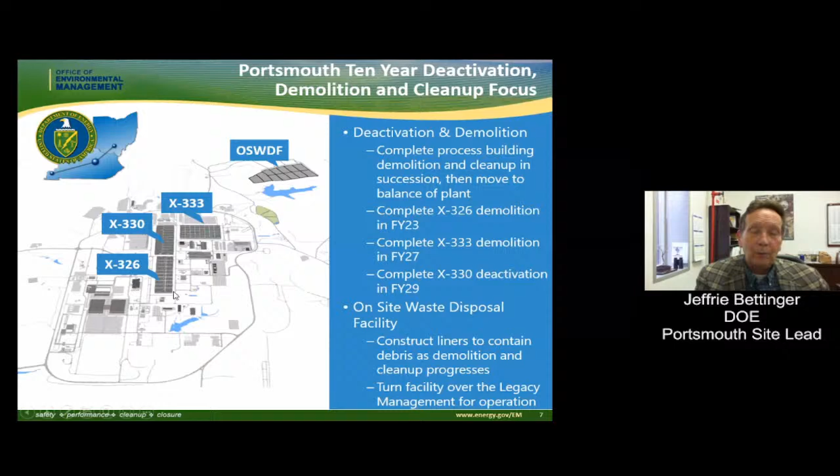When we deactivate a building, what we do is remove the radiological and hazardous materials from the building. In the 326, for example, we remove process equipment and all the asbestos. We'll be doing that in other buildings, although not necessarily all of the process equipment. Some of it will be able to go into the on-site waste disposal facility. The 326 was unique in that respect. But then we'll move to the 333, then the 330, and then we'll work on the balance of plant. And we're constructing the on-site waste disposal facility in parallel with this. May I have the next slide, please?

This is a great shot showing the 326 process building demolition. It's really kind of neat that we can get drones and come in and get good perspectives and photographs of this. I mentioned to you we completed the deactivation in September of last year. What that means was that all of the hazardous material had been removed from the building, and over 93% of the radioactivity, the radiological materials, have been removed from the building.

We did put together an extensive demolition design plan that was approved by Ohio Environmental Protection Agency in February of 2021. And once we got the approval for that demolition design plan, we started removing the transite. Transite is the material that basically encloses the building. You saw some pictures of it in the beginning. It's like large sheets of corrugated, it's almost like corrugated plywood, only it's an asbestos containing material. We don't want to do demolition with asbestos there because that creates asbestos dust. So we remove all of that material and package it up, and it goes into the on-site waste disposal facility.

You will have seen that before we removed all that material, it was a bright blue. And that's because we sprayed fixative on it. And fixative is really a souped up paint that's used to contain any dust and debris that could come off. It's widely used in the nuclear industry and in other industries to control dust before demolitions occur.

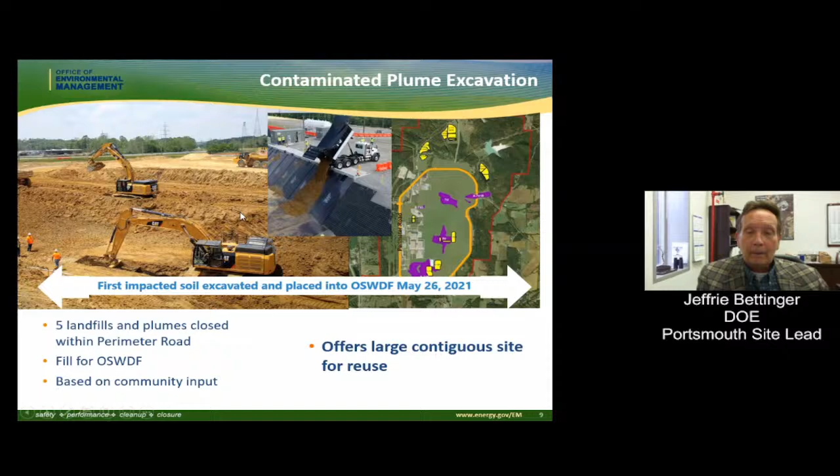I talked to you a few times about the on-site waste disposal facility. This is another overhead shot of it. I also spoke to you about the transite that we took off, and I said that we package it up and then put it in the on-site waste disposal facility. That was the first waste that we placed in the on-site waste disposal facility. You can see it there. It's actually wrapped up.

That's because it's asbestos-containing waste. And we use that and then put it in as a bottom layer in the on-site waste disposal facility in several grids, and then put soil on top of it, and then the debris goes on top of it. But let me talk to you a little bit about the photos that you see here, this drone shot of the on-site waste disposal facility.

On the left-hand side, you see cell one. We completed construction of that last year, and it is currently accepting waste. You can see that not the entire cell is active because you can tell by the soil in there. Some of those are grids that are closed up. We call the area where we place the debris a grid, and it's all cataloged so we can keep track of the material that goes up there. So we know which grid each truckload of material goes into.

You can see the darker brown areas. Those are active grids that they're working, where they're taking the debris in there and they put it in place, and then they're compacting it and putting soil on top of that and recompacting it to work it. We have dust control at the on-site waste disposal facility, similar to what we do at the structural demolition, and we also have monitors in the area.

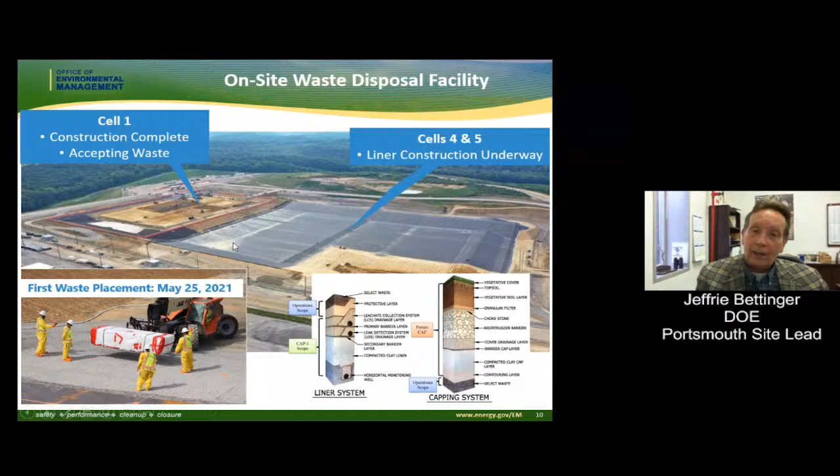So I talked to you a lot about what we're doing out there, but how did we get to the point where we decided to do that? Our integrated safety management system, which is the way that we approach things here in the department, tells us to first look at what we're going to do and try and determine all the potential hazards, all the things that could possibly go wrong. We do that based on our knowledge of doing it, but the most important thing that we do is we incorporate lessons learned from experience at other DOE projects.

And as I mentioned to you before, I've got varied experience. I bring that to the table, and a lot of our other folks that are working here are able to bring their experience, and also subcontractors bring their experience, like our demolition subcontractor. They bring their experience to the table, and we try to identify everything that could possibly happen.

First thing that we do is we remove hazards so that we don't have to worry about them when we're doing the demolition. And that's what we did in the deactivation. Took all the asbestos out, the bulk of all of the process equipment, a lot of the piping, did extensive measurements to ensure that any material left in there was safe to go into the on-site waste disposal facility from a radiological point of view.

And we had numerous times when we walked down the building just to look for things that we may have missed when we're doing it. And all this stuff is extensively documented. And any of the other things that we've done are contained in that demolition design plan that I told you Ohio EPA reviewed and approved.

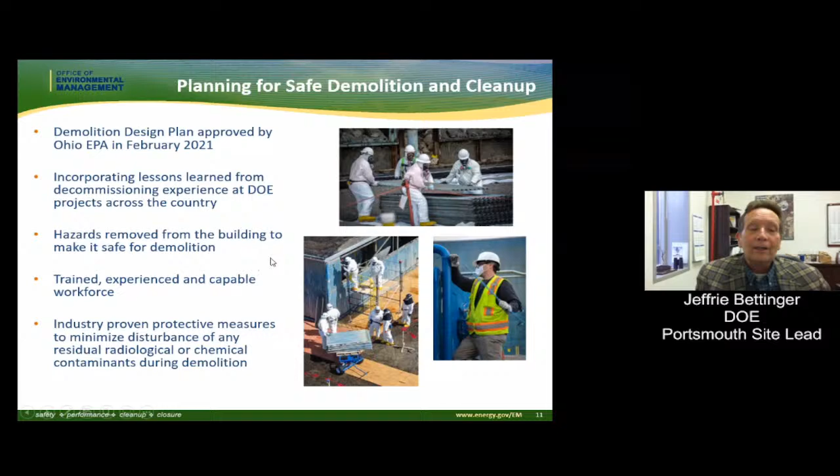We bring in a trained, experienced workforce. Our demolition subcontractors are highly trained, and they've done this work before at other sites. As I mentioned to you before, we use the foggers, things like that; they're industry proven, state-of-the-art protective measures. May I have the next slide, please?

Anything that we can't remove as a hazard, we engineer engineered controls. Many times these are based on common sense and lessons learned. One thing that we had was a lesson learned related to water. We knew that we'd be using a lot of water. We knew that this was a 30-acre slab at some point that would be open, and that even rainwater going on it had the potential to take contaminants off it.

And so what we did is we built a berm around the entire 30-acre slab. And this berm collects all the water that runs off of it, the water that we apply as we're fogging it, as you can see in that photograph, and other water that may come from rainwater. We collect that and we take it over to a facility that is purpose-built to treat this water. This is a part of it. This is the outside where the preparatory work is done on the water before it goes in there.

Inside that white structure that you see there, we have chemical treatment, ion exchange, carbon filters, various processes that are designed specifically for the contaminants of concern to process that material that's in the water. And then once that's done, we're able to discharge that water to one of our permitted outfalls. And we're constantly sampling and monitoring that to make sure that it's working well.

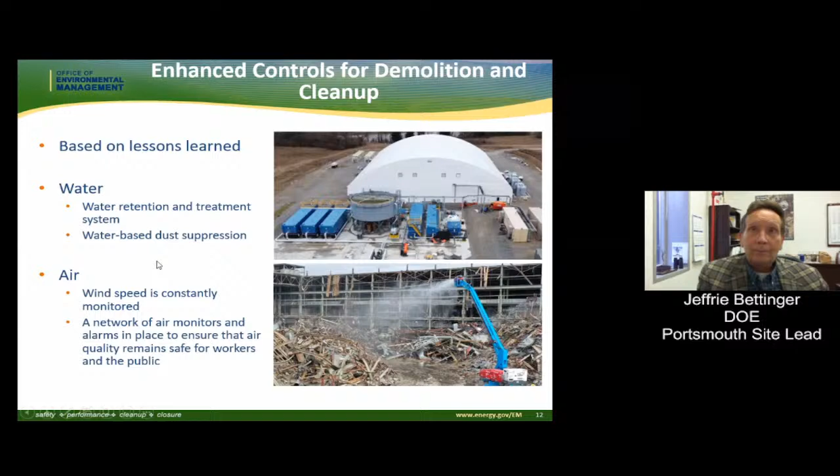And in addition, we have also put a network of air monitors in there. Can I have the next slide, please? Several types of air monitors, in fact. We've got real-time project monitors. Frank's going to talk about that. He's going to explain that to you, and he's going to show you some of the results that we get from that.

In addition, something that I'm very proud of is that we've actually worked with Ohio EPA and ODH and have co-located a network of air monitors on site. These monitors are in conjunction with our existing monitoring system that monitors the site perimeter, both on-site and off-site. Every place where we had a monitor, we put an Ohio Department of Health monitor next to it. In addition, we identified 5 new locations where we put a monitor with the Ohio EPA and DOE.

And those OEPA monitors are monitoring for asbestos, organic materials, particulate matter, PCBs, and those types of materials. And with that, I'm going to turn it over to Dr. Higley, who is going to talk to you about managing risk, and then we'll go to Frank, who's going to talk to you in more depth about those monitors. Thank you.

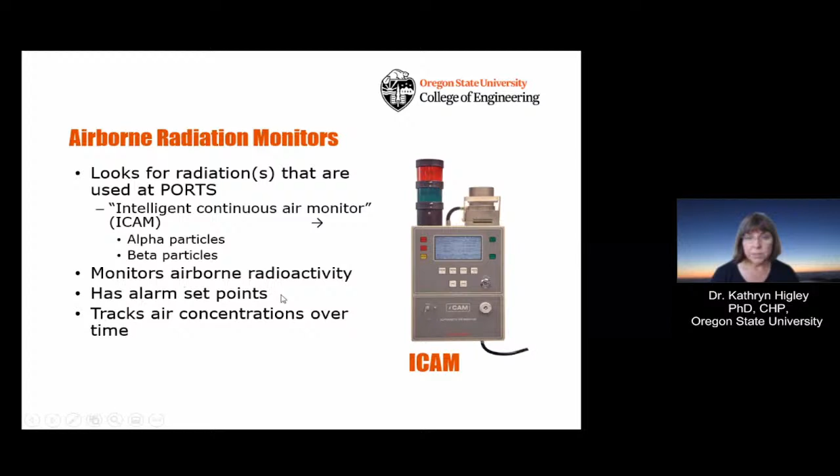One of the types of detectors that they use for monitoring for airborne radioactivity is something called an ICAM, which stands for an Intelligent Continuous Air Monitor. So this is a device that continuously pulls air in through a portal, and it is monitoring both alpha particles and beta particles, which are given off by radioactive materials and the radionuclides of concern from the site. So you can monitor the airborne radioactivity. You can have alarm set points, you decide what those are, and you can track your air concentrations over time. So you have multiple ICAMs located around the site. And again, Frank will spend a little more time speaking to these particular devices. Next slide.

So what does the ICAM look for? Well, it is measuring or tracking radiation doses from airborne radionuclides, radioactive contaminants. And it's monitored, you'll hear Frank talk about this, using the terms DAC and DAC hour.

They're kind of obscure terms, but they're derived air concentration. So it's a measure of how much radioactivity is in air, and it's a worker-focused measurement because you're concerned close in about what the workers are exposed to. So you're setting it to protect those people that are working in the highest potential concentration of these contaminants.

So a DAC is a dose rate, and for example, 8/10 of a DAC gives you about 2 millirem an hour. And a DAC hour translates into a dose, and 2,000 DAC hours translates into 5,000 rem. 1 DAC hour is 2.5 millirem. So one of the questions is why 2,000 DAC hours?

So originally, when they were setting up derived air concentrations, the thought was, how long can a worker working a full year, so 40 hours a week, 50 weeks a year, 2 weeks for vacation, how long can they work in an air concentration to not exceed their radiological limit? And that's where DAC and DAC hours came from.

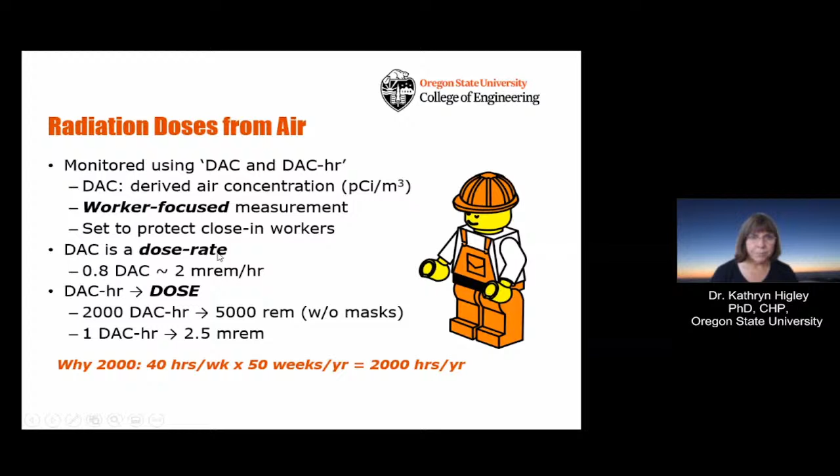So the natural background gives you about 300 millirem per year, just on average for people across the United States. If you have medical procedures, that could add another 300 millirem per year plus. That's things such as dental x-rays, x-rays for broken bones, or CT scans. And to put it in perspective, for Portsmouth, the annual operating activities generate a dose of roughly a millirem a year in the offsite public. And the radiation workers on site typically are getting on average about 60 millirem per year from one of the most recent reports.

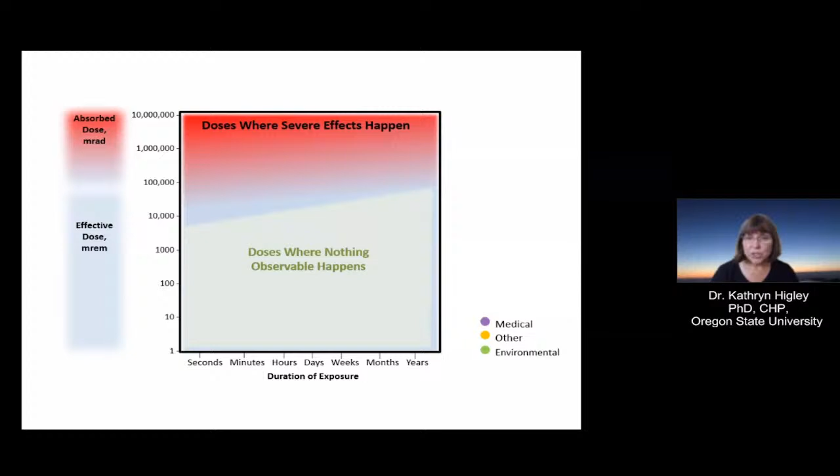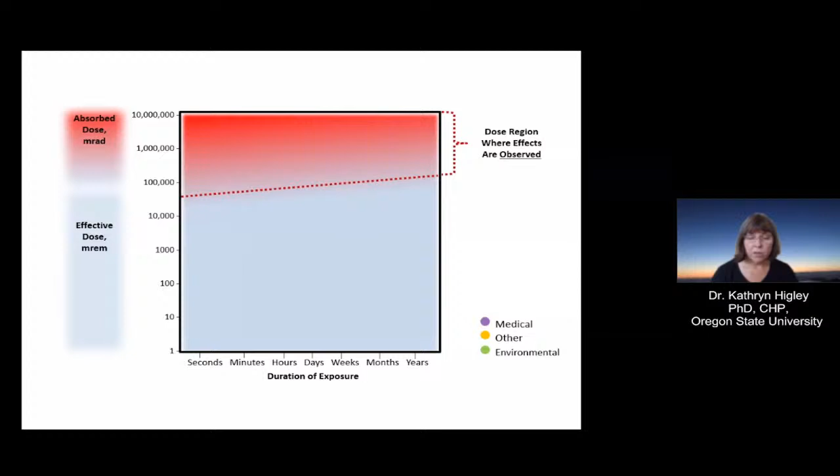So the red portion shows us where we see severe effects from really high doses. And then down in the environmental range, nothing really observable happens. It's very, very difficult to monitor any sort of effect. So again, when you have high doses, you can actually observe acute effects from radiation burns to definitely cancers. But in this lower region, the lower 2/3 of the graph, we have to calculate that using mathematical models. That's where the natural environmental doses fall in. That's where diagnostic X-ray procedures also fit.

But things like radiation therapy, cancer treatment, we are intentionally killing cancer cells. So those are observed effects. And then we've also learned from things such as the Japanese atomic bomb survivors, from the accident at Chernobyl, and more recently the accident at Fukushima. All of these have helped contribute to our understanding of radiation risk.

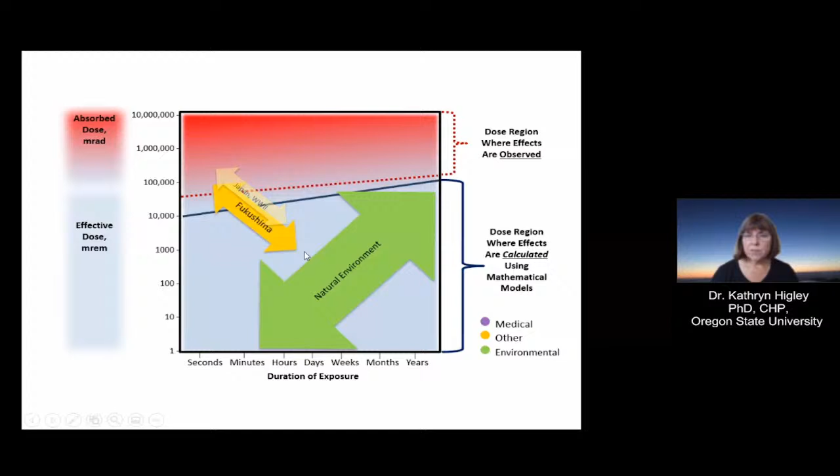But most importantly, as I said, the doses in the natural environment are where we can calculate, but we haven't observed risk. The typical kind of soil cleanup levels that EPA might ask for are down in the 10 millirem range, and the levels of dose from Portsmouth are down in the 1 millirem. And the worker administrative limits are on the order of 2,000 millirem per year. So all in the range where we could potentially calculate an impact, but we do not observe it.

So moving on to particulates, they also monitor particulate material that can be created as a consequence of the decommissioning activities. And the two that are monitored and reported, and Frank will speak to this, are PM 2.5 and PM 10. And these have standards that are specified under the National Ambient Air Quality Standards. They have annual average limits. They also allow short-term average concentrations, and they're different between the two sizes.

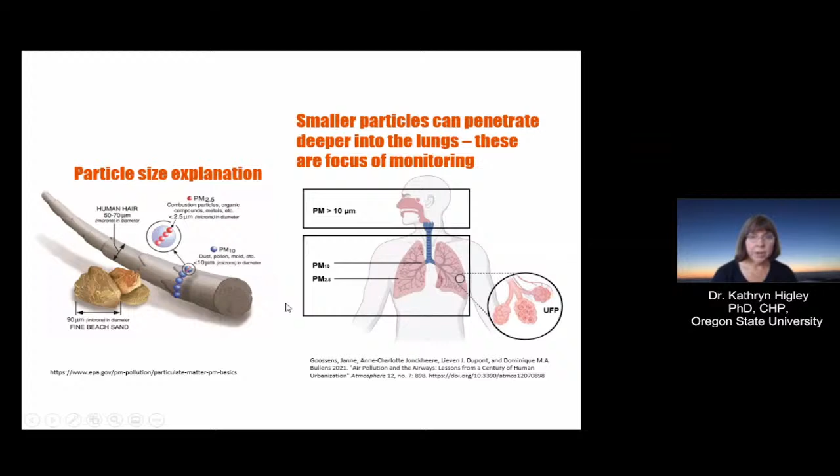Next slide. So with regard to the particulate monitoring for Portsmouth, as I mentioned before, the National Ambient Air Quality Standard does allow for short-term elevated air concentrations. They have specific limits, and those are tracked. But the intent is to allow for worker safety, but still get the necessary work done.

Now, the other thing, Jeff had mentioned about fogging and misting as a way to knock particles out of the air so they don't travel as far. The bigger particles just naturally settle out very, very quickly. The PM10s and the PM 2.5 do settle out, but they can travel a bit further. So again, this is one of the reasons for things such as fogging and misting to help knock them down sooner and limit their concentrations.

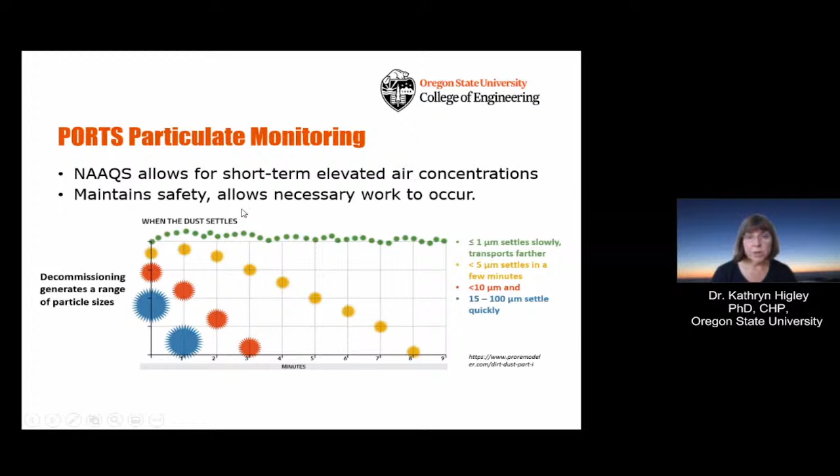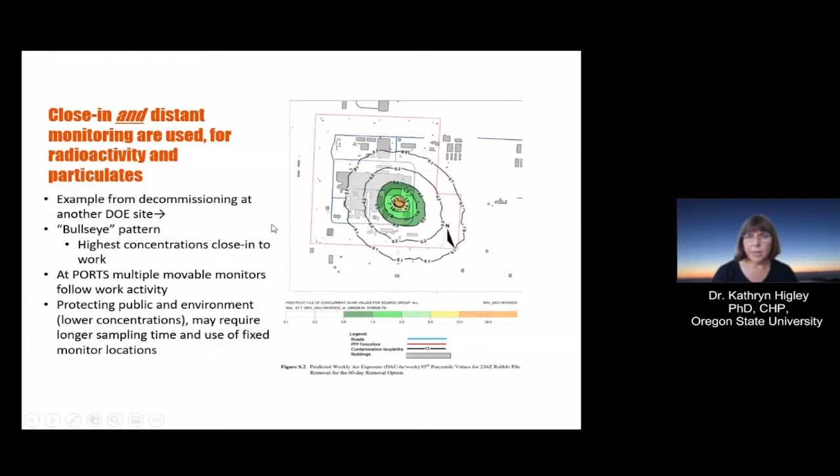At Portsmouth, they have multiple movable monitors. And again, Frank will speak to these. And for the close-in ones, you're monitoring for DAC hours, but for protecting the public and environment where the concentrations may be much, much lower, you may need to use longer sampling times and have fixed monitoring locations and report things in slightly different units.

Next slide. So the whole goal behind these airborne measurements is protecting the people that are taking these buildings apart. You need to monitor the safety and compliance of these activities against standards that apply not just to workers, but for protecting the public and the environment. And this also makes sure that the decommissioning activities meet these standards. So they're monitoring airborne radioactivity for alpha and beta radiation attributable to radionuclides of concern, and those are reported in DAC hours. And then they're also monitoring for particulate matter for the PM10 and the PM2.5. Next slide.

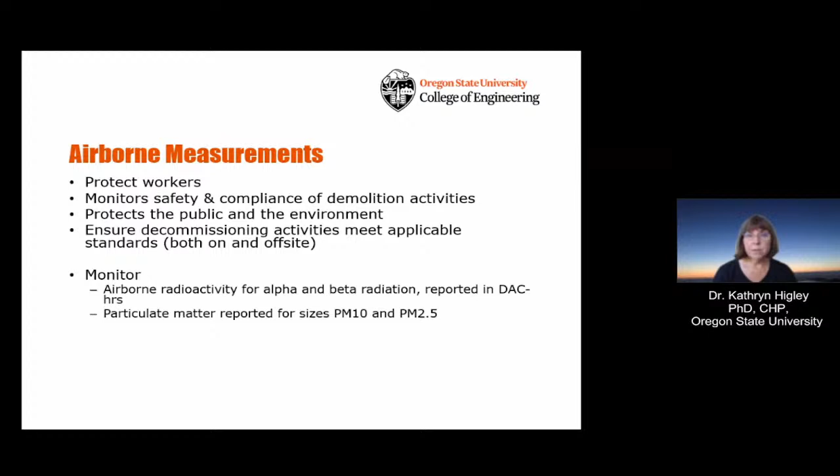So in summary, kind of going back to my first couple of slides, acceptable risk varies depending on your point of perspective, but there are regulations that underpin these things. And importantly, the goal of this remediation is not to remove all the risk, but to reduce it to a level that provides for safety for the workers, the public, and the environment. And safety is always part of this.

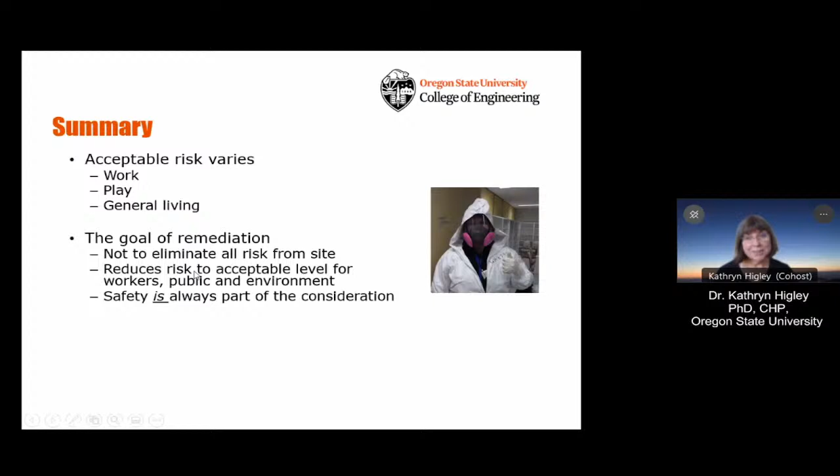I am the Director of Environmental Protection for Fluor BWXT, the contractor to the Department of Energy. We are the primary contractor here on site for the D&D and environmental remediation of the site. A little bit there on my experience. The majority of my experience has been in sites just like Portsmouth, involved with D&D and environmental remediation. I have had experience as a state regulator, and I do have a lot of experience with control systems, wastewater treatment systems, and air pollution control systems. Next slide, please. So you have seen this slide before, but I want to elaborate just a little bit here.

There's not a whole lot of variability year to year, so we have a pretty good idea of what the prevailing winds are. But this is one of the key things that we use, as Dr. Higley indicated, in designing the air monitoring network that we have. So we use things like the wind rose, best practices, industry practices, other meteorological data, input from the community, in establishing and designing the air monitoring network that we're currently implementing here at Portsmouth.

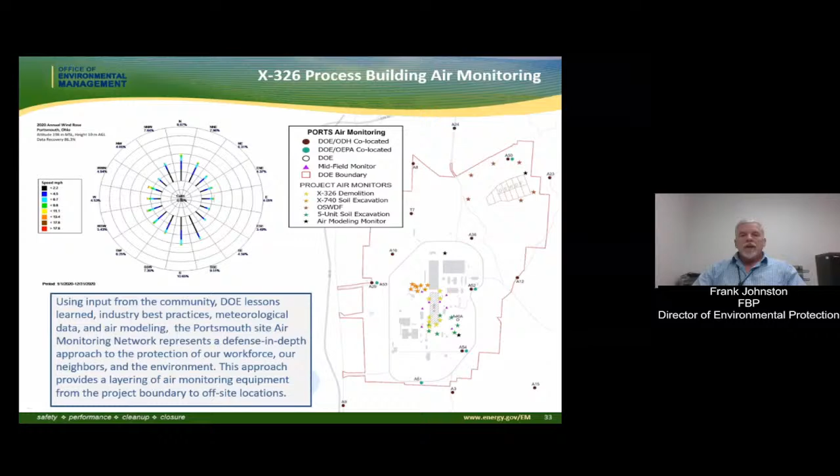The air monitoring network itself is shown. It's a little hard to read. You've been informed that these slides can be downloaded, so you can have maybe a better picture of the monitoring network. But the monitors are set up in a layered approach, where we have air monitoring at project boundaries. We have monitoring called midfield, which is between the project and the property boundary. And then we have monitoring at the property boundary and even off property. So it's this layering effect that gives us a good indication of the air emissions releases from the project boundary through the property boundary. Next slide, please.

So as was mentioned, we went through an extensive deactivation of the X-326 process building. The 326 is going to be the focus of the remaining presentation here. We had an extensive deactivation process from 2011 through 2020. That process removed process gas equipment, a lot of piping, and there was an asbestos abatement effort for the friable asbestos in the 326 building. The removal of hazardous waste, universal waste, draining of oils, other liquids, solvents, those types of things all occurred during the deactivation portion of the project.

So with all that done, there was still some residual radiological and chemical contamination, just from the operational history of the building. In addition to those residual contaminants, there are contaminants that are inherent in the building materials themselves, the structural steel, the concrete, other piping. So those things combined, the residual contaminants and the contamination inherent in the materials of construction, led us to develop a very comprehensive list of contaminants of concern.

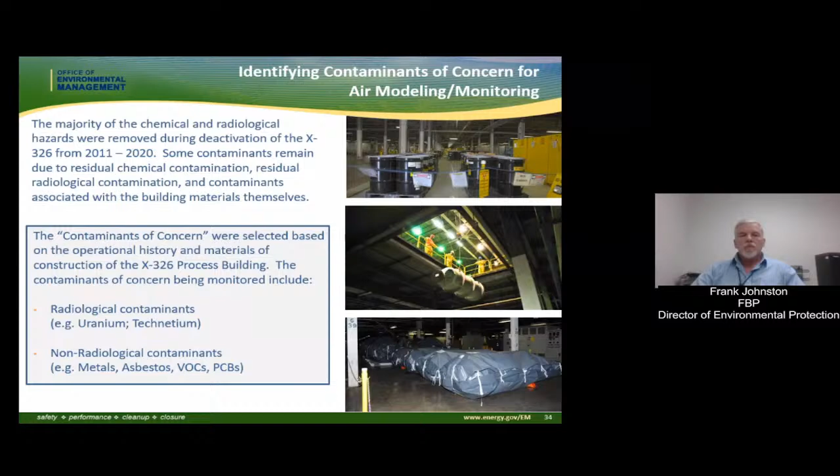The other class of contaminants that we're concerned with and want to monitor for are polychlorinated biphenyls, PCBs. Those were used in electrical equipment, and in the gaskets and the ductwork in the 326 building. So that was also a contaminant of concern that we are monitoring for. Next slide, please.

So we have air monitoring locations. We have the contaminants of concern. The next step was an air modeling effort that we did as part of the design effort for the 326 demolition. In this air modeling effort, we brought in a consultant to perform this modeling for us. We had this model independently reviewed by our expert. DOE had their own independent expert that was retained that reviewed it. And this model was also provided to Ohio EPA for their review and concurrence, which they did in May of 2020.

And this model was used to estimate emissions from the individual projects, including the 326 demolition, but it was also used to model and estimate the cumulative emissions from all the activities that were occurring. As Jeff indicated in his presentation, there are other things going on here other than just the demolition of the 326. We have soil excavations, OSWDF operations. So this model looked at the individual sources, but it also looked at the cumulative impacts from all these activities.

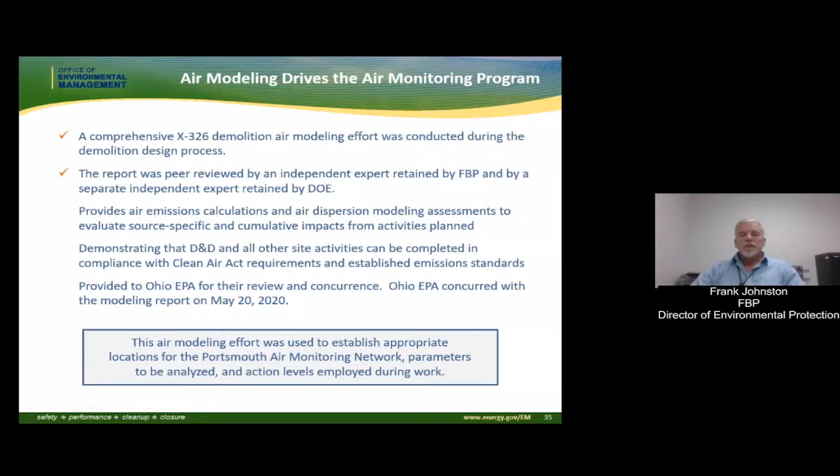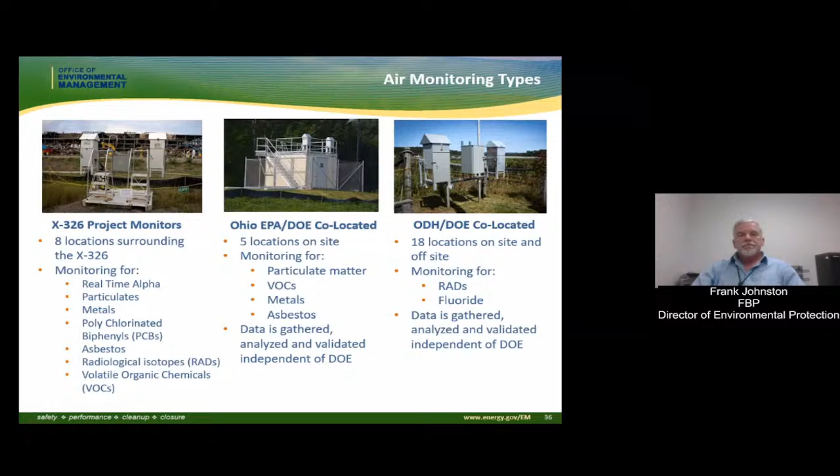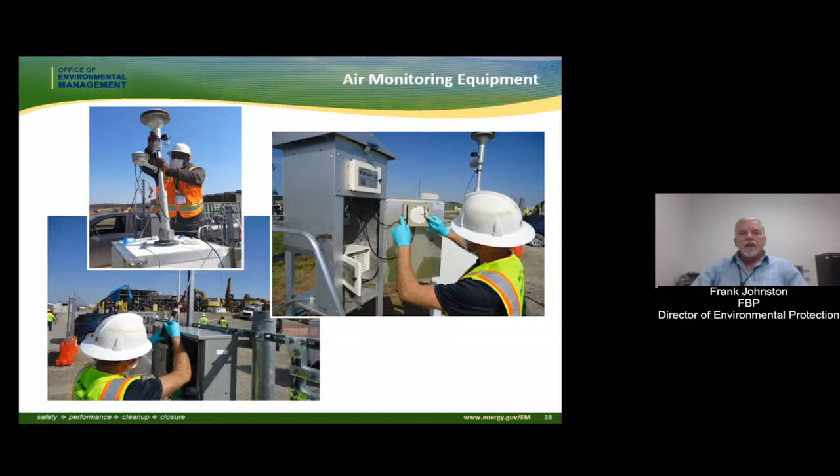So this is just an example of some of the air monitoring equipment. Depending upon the class of pollutant that's being monitored and sampled for, there's different equipment for that. For example, the top left picture there is a picture of the real-time particulate matter we'll be talking about here shortly. Next slide, please.

One of the things that we are very conscious of is the operability of all the air monitoring equipment that we have, because we want to make sure that no matter what the activities are ongoing, that we have sufficient amount of air monitoring equipment in place. So we do a daily go, no-go for those activities based on the air monitoring that is in place and operable. So every morning we have folks go out before work starts and confirm that the monitoring equipment is up and running and operational. Make a decision every morning of a go or a no-go based on that feedback. Next slide, please.

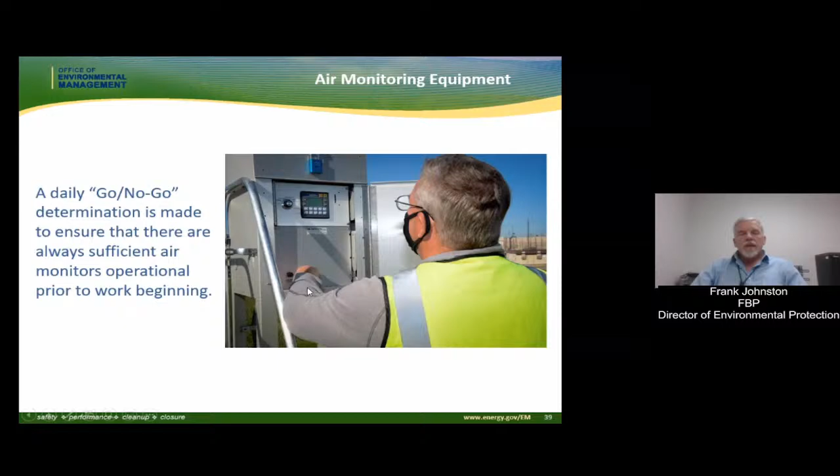So I want to talk a little bit here about real-time monitoring. We have already mentioned that we have the 5 ICAMs that provide real-time measurements of alpha and beta. These readings are monitored continuously by a radiological technician. The ICAMs themselves include visual and audible alarms if any of the predetermined settings are exceeded.

The real-time particulate matter monitors for PM10 as well as PM2.5 at 3 of the project locations around the 326, as well as all 5 of the DOE and Ohio EPA co-located monitoring stations. These results are reviewed daily by project management, environmental remediation, and environmental protection folks, including myself. We also have set up that these monitors can send real-time email alerts when predetermined thresholds are exceeded.

Now, this gives us real-time feedback that we can go and adjust our controls, look at the operations that are ongoing, adjust the positioning of the water misting, locations where water misting needs to be increased, those types of things. So those automatic email alerts give us the ability and the feedback in real time to go out there and control the emissions that are occurring. Next slide, please.

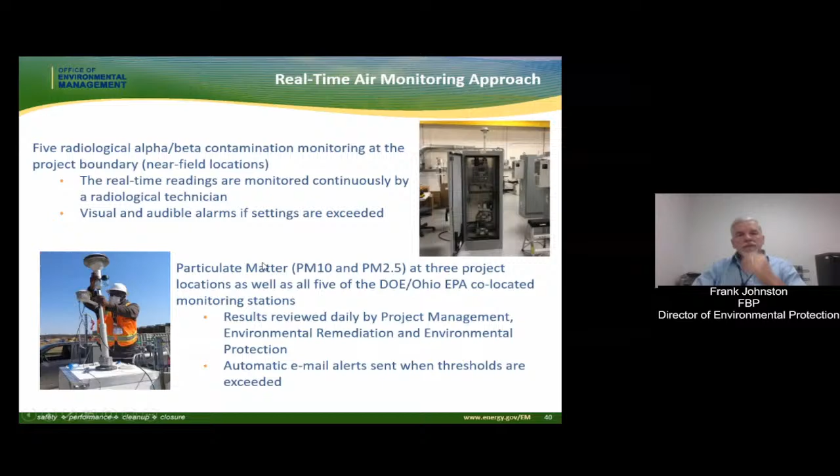So that real-time monitoring provides the first line of defense for us. It's very important as it helps us control the emissions as the demolition is proceeding. Thresholds are established such that if the emissions at the project boundary meet established limits, then there's assurance that it's going to meet at the property boundary. That's a fundamental concept that is part of our air monitoring program.

We have these thresholds at project boundaries so that we can react if something goes on, immediately there, so that we can continue to ensure that the property boundary is safe and we're meeting whatever compliant limits that we have to meet. Provides the ability to immediately react to field activity.

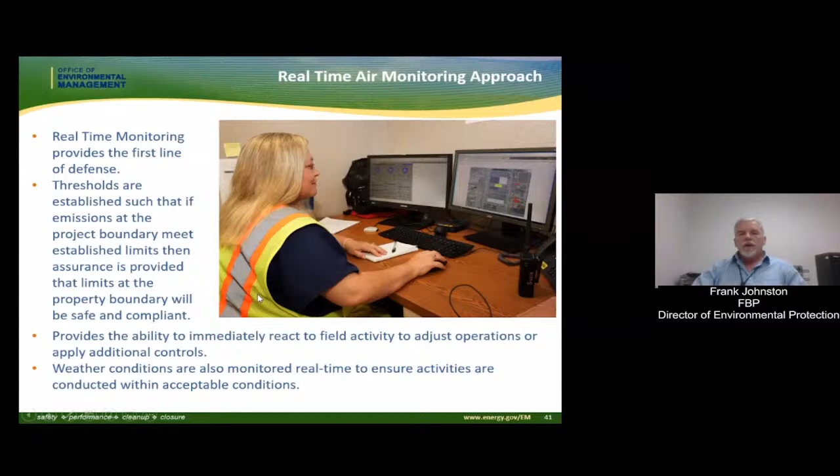The other part of the real-time monitoring is the weather conditions. You'll see in the picture here, radiological technician monitoring both the alpha and beta as well as the real-time meteorological feedback from our meteorological stations. Next slide, please.

The low action level is really a heads up. It's basically telling us that maybe an assumption isn't quite right. Maybe there's some additional controls that have to be applied. But that low action level is really based on the emission estimate from the modeling output.

Now we have a medium action level that is based on a regulatory threshold, and we set that at 75% of the regulatory threshold. If we happen to exceed 75%, we perform an operational review with project management, all the project folks, environmental protection, safety and quality assurance, and other support organizations to understand what might be happening that is causing an exceedance at that level. Because again, we want to stay below the requirements that we have at the property boundary.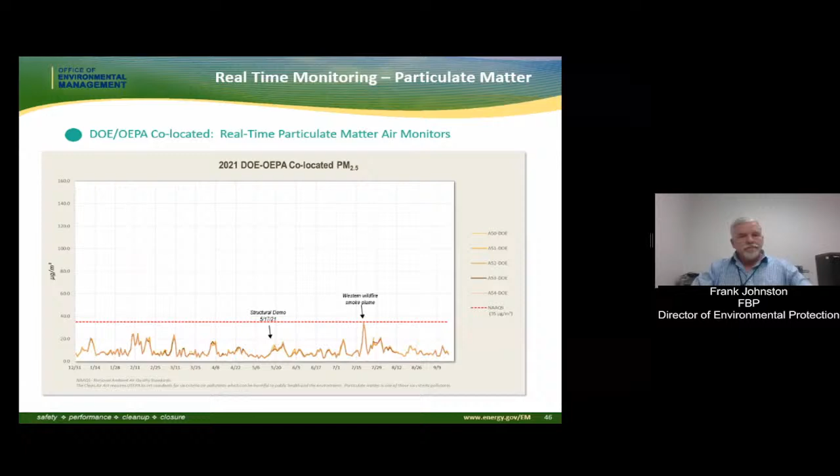Next slide, please. Donnie, next slide. Are we on? There we go.

So let me talk just a little bit about the real-time monitoring for the radiological contaminants of alpha and beta. It has been mentioned we use these intelligent continuous air monitors for this purpose. And we have set an alarm at the 0.8 DAC hour level. And I'm not going to repeat what Dr. Higley went through, only to say that that alarm level is at an occupationally safe level. But if it alarms at that level, we get with our radiological engineers or project supervisors, and we take action to attempt to bring those emissions back down.

If we have a 2.0 DAC hour, we have a limit there that we go ahead and we stop work. Pull people out, secure the site, figure it out, and put whatever corrective actions are necessary in to go back and continue working. In addition, all our modeling and all our monitoring is based on wind levels less than 15 miles an hour. So if we have sustained winds above 15 miles an hour at a height of 10 meters, we stop work. We use the sustained winds over a 15-minute period to be able to make that determination.

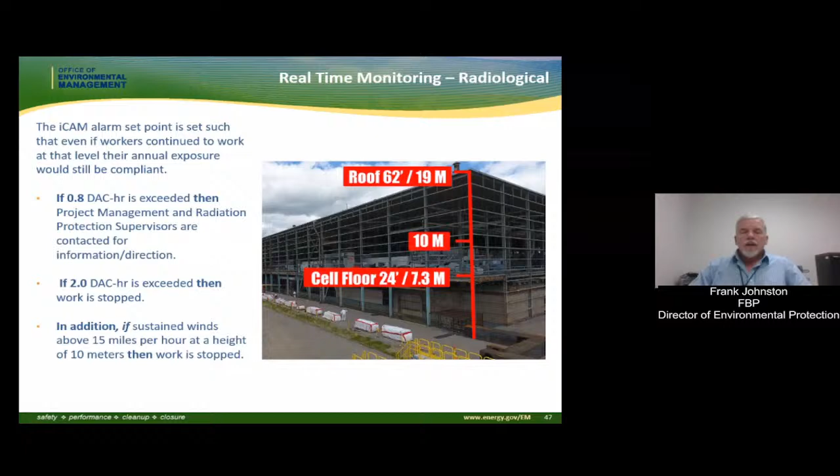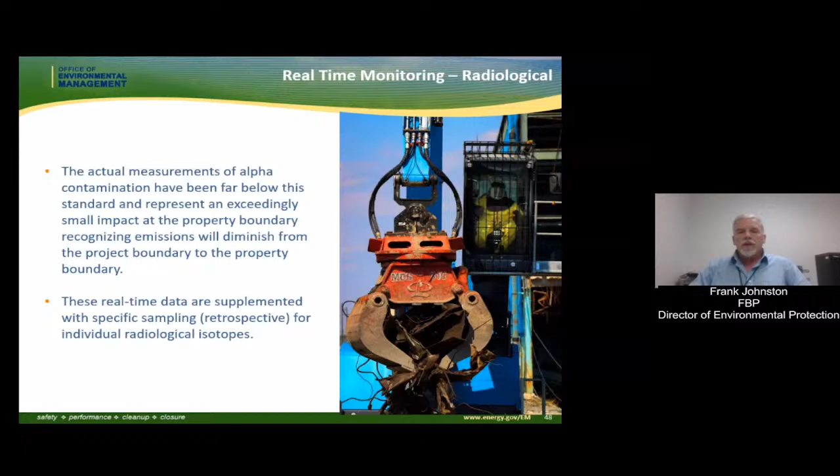Now, the 10-meter height is important because that separates the cell floor from the operations floor. The cell floor is where the process gas equipment is. So it is that level that we want to ensure we understand the wind conditions. Next slide, please. So this is just a foreshadowing of my punchline here in the next slide. Actual measurements have been very good. In fact, you can go ahead and proceed to the next slide, Donnie.

This is showing the real-time alpha compared to the 0.8 DAC hour limit from the beginning of April through the end of September. You see that at all 5 stations, the alpha has been very low, consistently and reliably low and protective. It goes to show and tell us that the contamination is low and it's staying within the project boundary. Next slide, please.

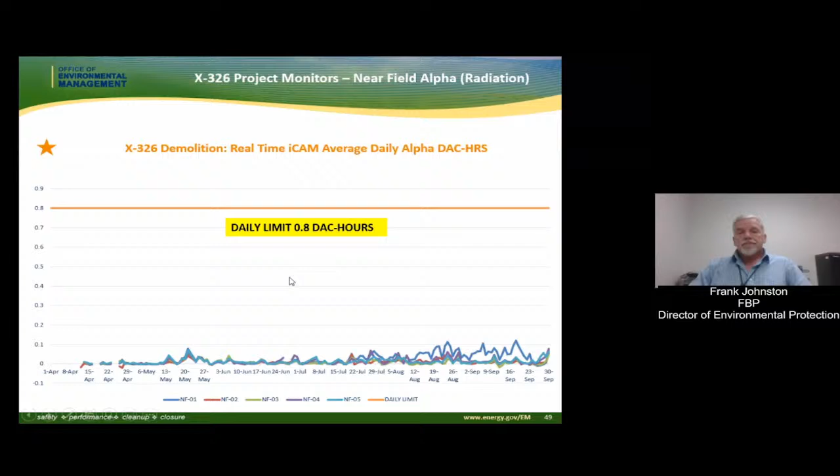So in summary, the charts that I went over are showing that the PM data that's recorded to date, we've had good success. The control of fugitive emissions has been good with the water misting, the fixative applications, the things that we have been doing have been pretty successful so far. Same for the radiological releases as measured by the real-time alpha and beta. It's indicating that the controls that we've instituted are protective of the workers and the public. With that, I think I will turn it back over to Eric.